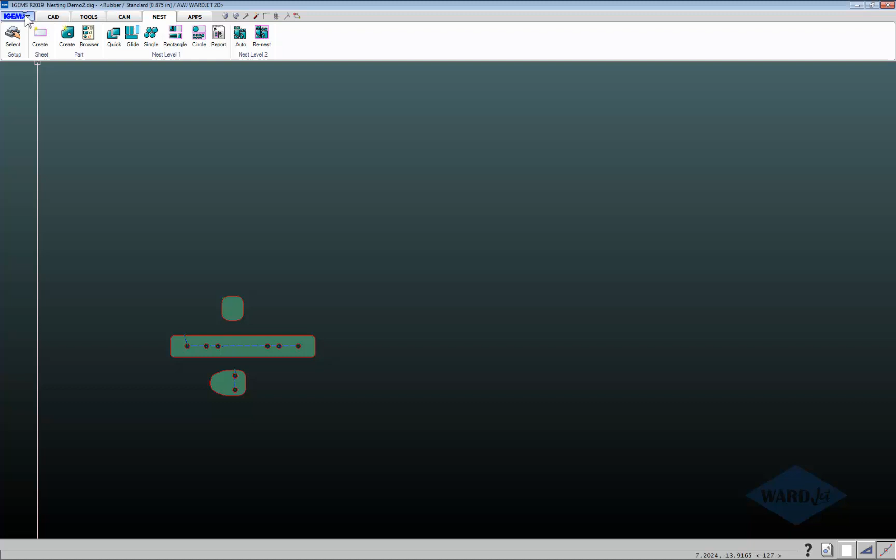IGEMS has a couple new things in the nesting area. So I'm using 19.2.18.85 that came out here the past couple days.

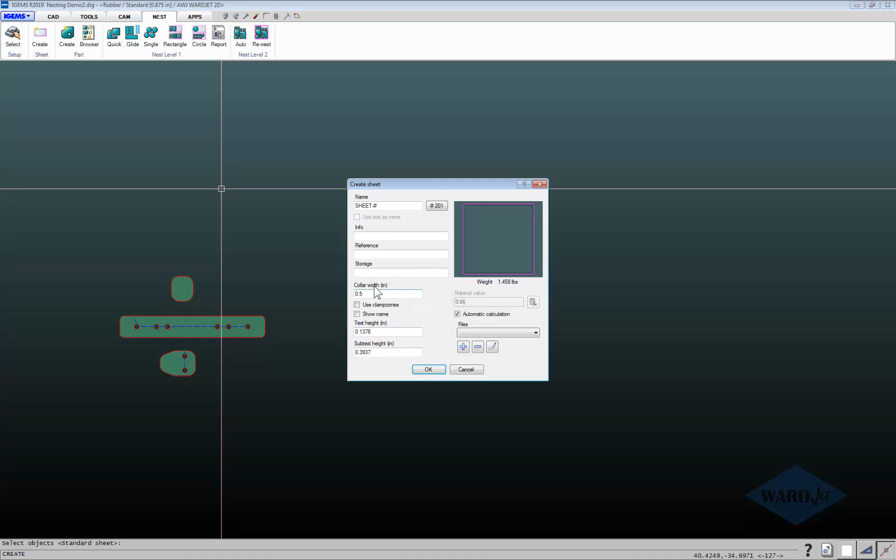So first of all, in the sheets area, if you go into create a sheet and you just hit enter to bring up your list of standard sheet sizes, these are now sorted from smallest to largest based on the first number here. Hopefully that'll make it a little bit easier to sort through things. So I'm going to put one of these sheets into my area here.

And they've also got a grouping option now. So if these three parts go into a kit, and for example I need 2 of these and 2 of these for every one of these, you can basically specify these to be a group, and then it'll always keep the equal numbers of those parts on a sheet to keep things a little bit easier to sort.

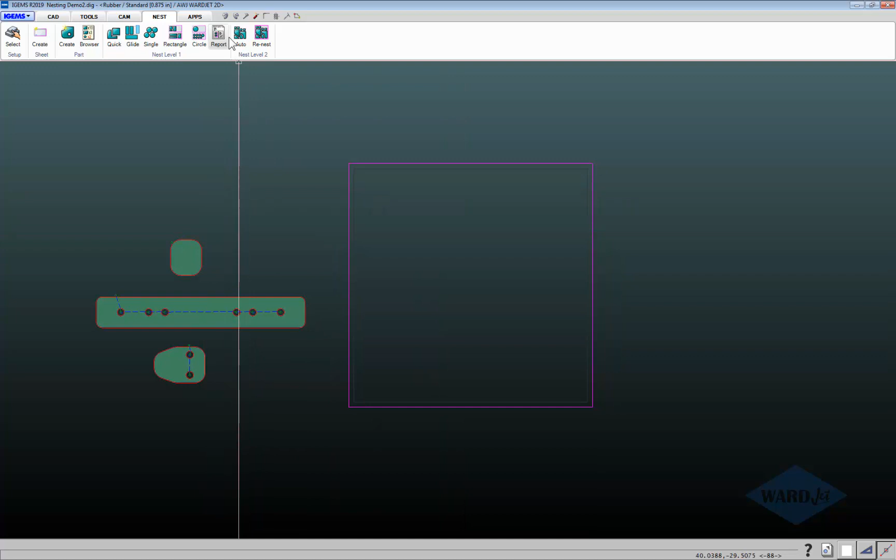So we go to auto, and I'll go ahead and nest those onto this sheet here. So now there's this groups tab here. The parts tab would just be used like normal if you just wanted to do individual pieces and they weren't grouped. But if you do want to group pieces together, you would set all of these to 0, and then you go to your groups tab, and down here at the bottom, click on the plus, and then you can select the parts that go into this group.

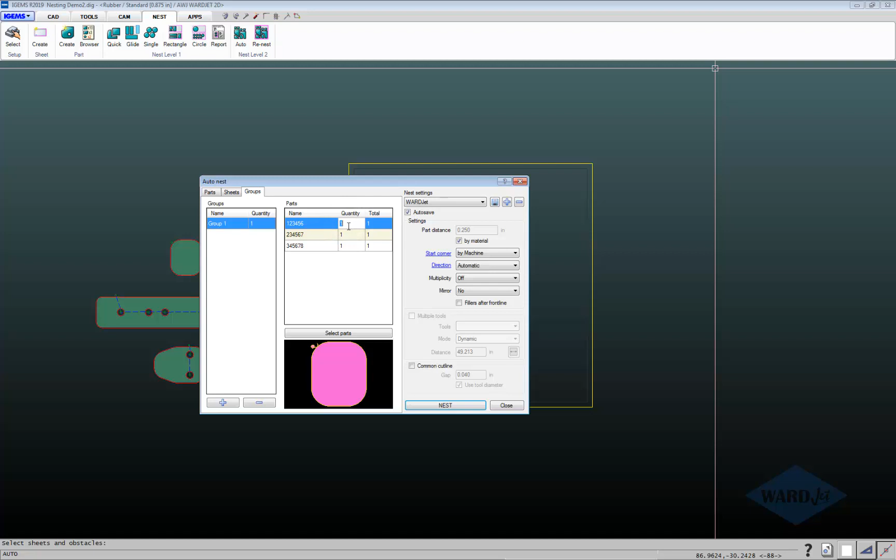So we'll select those 3, and then I'll basically say I want 2 of those and 1 of those and 2 of those in a kit or group. And then over here, you can tell it how many groups that you need to nest. So if you're making 35 kits or whatever the case may be, plug that in. You can come in here and rename this if you need to, and so on.

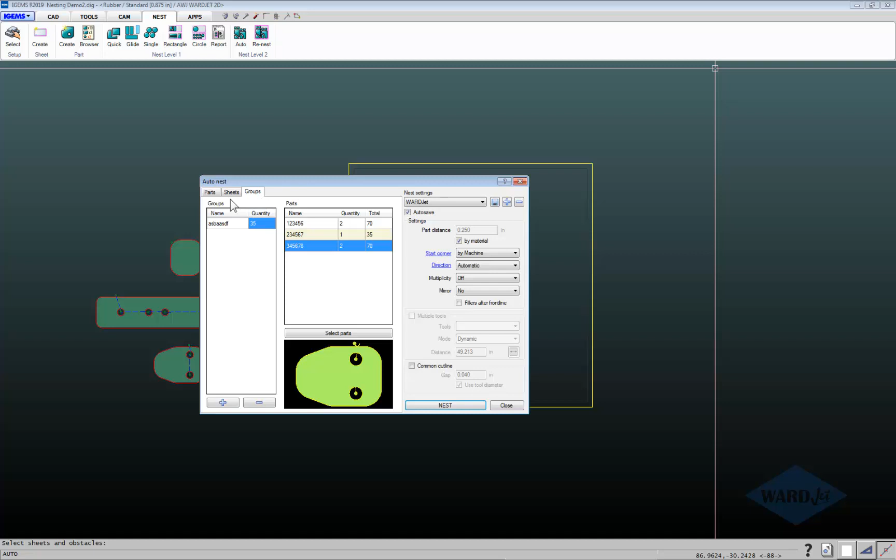And then let me go to my Sheets tab and give myself some sheets here, and we'll click on Nest. And then you can kind of see here how it's grouping them together, where we're going to have, in this case, 3 of these, 6 of these, 6 of these on every sheet. And then it'll lay them out like that.

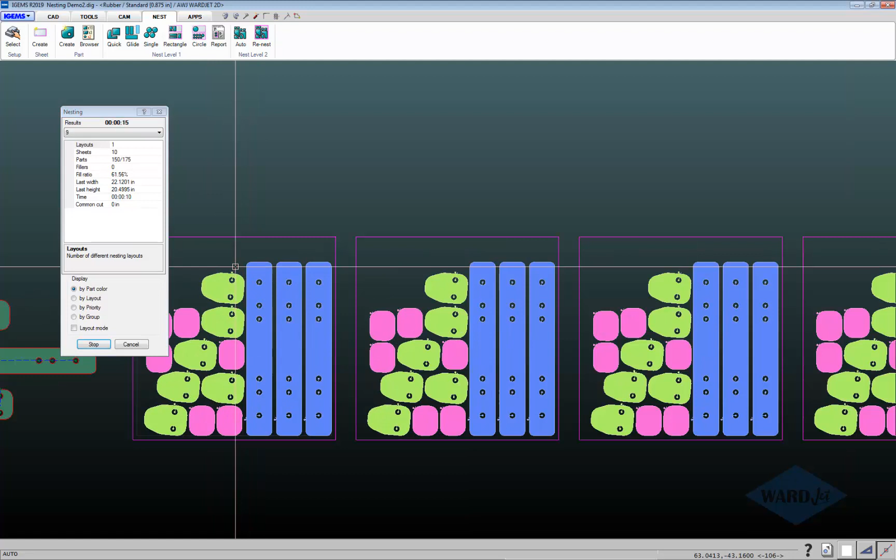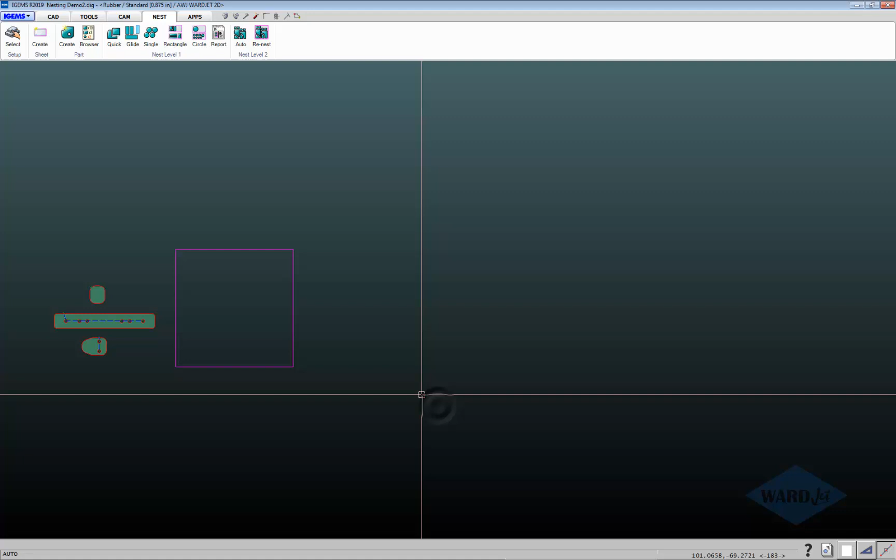Now you can use the regular parts tab on there to fill up a sheet, or if maybe one of these parts is a consumable and you need extras, if I click on cancel, I can come back here and on the parts tab, say give me 50 extras of those. And then you can also specify things like fill parts for that one. So then when I click on Nest again, it'll go through and do that again.

It'll maintain the quantities of the kits, but then because I told it that I've got these extra ones that I want and the fill parts, it'll put those on there also.

And then if something isn't part of the kit and you want to remove it from the kit, you can click on the Select Parts area and take it out of there. If you need to add it back in, you've got an existing kit, click on Select Parts and then select the part again, and you can put it back into the kit.